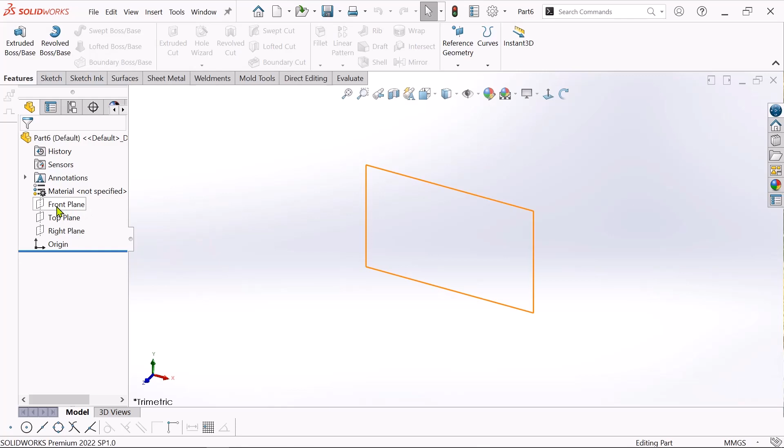Okay, just choose front plane and sketch, and go to this line and click center line and sketch a center line. This origin point, just click this origin point to this.

Now move it this left side and right side. If you confirm it is vertical, just when you get the yellow symbol as vertical, at that time you confirm your sketch is vertical. If you sketch at an angle, a little angle, you will not see the yellow symbol. Just move it on this origin, just see the yellow symbol is available visually, so we confirm that your sketch is vertical.

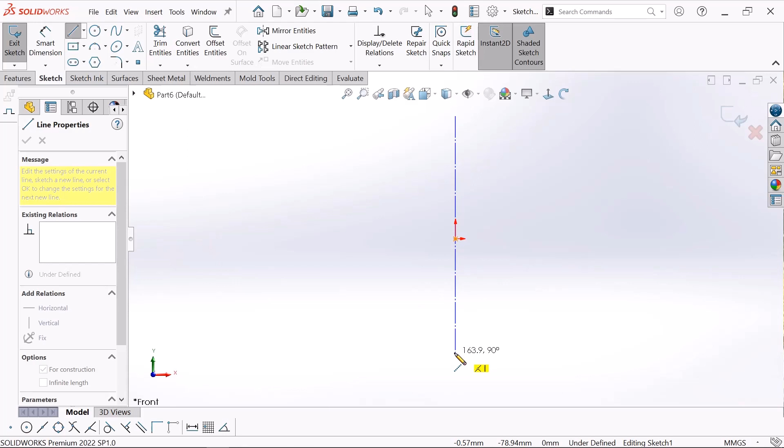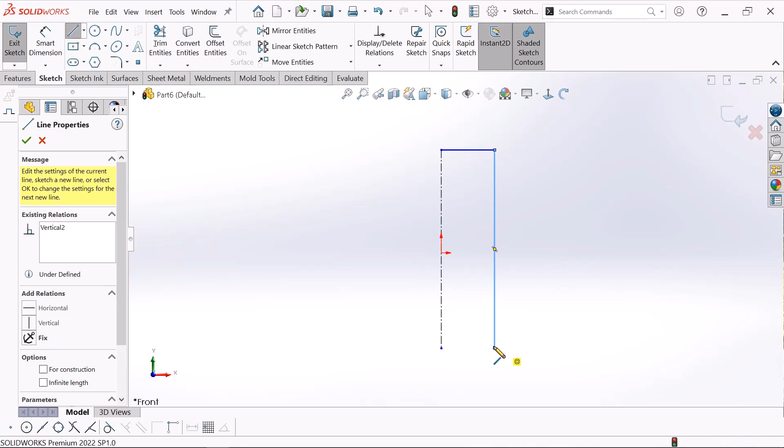Just click and right click and select. Now go to this line and sketch this point to the right side and this point downward, and again click this point to the left side. Just right click and select OK.

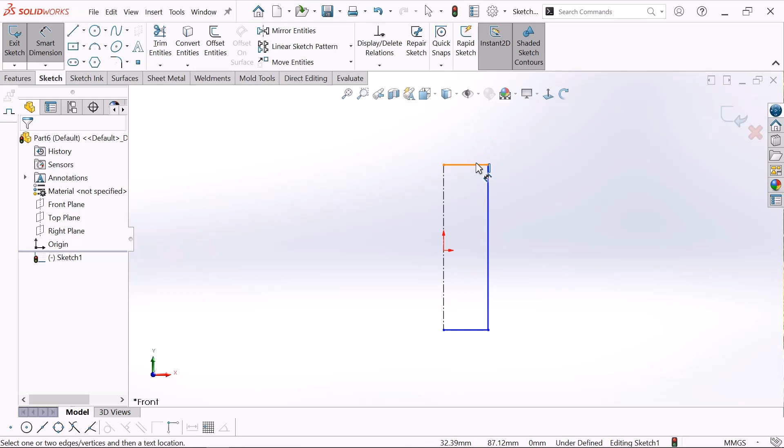Now go to smart dimension, just make it dimension, this dimension, suppose I will make it 150, click enter, and again make it, just click and click 40, click enter. Now our dimension is fully defined.

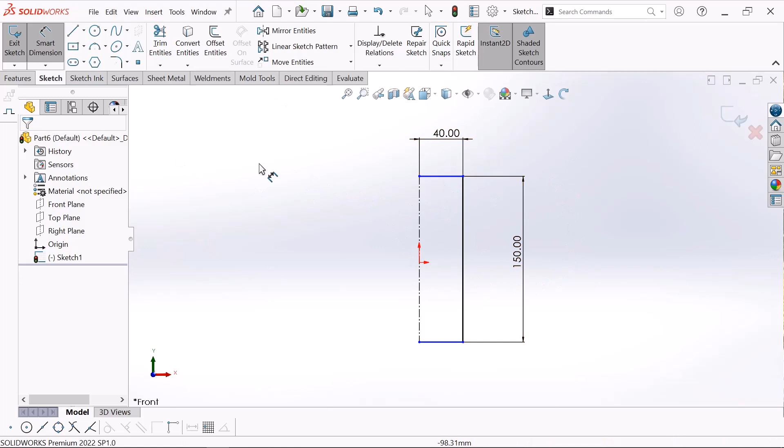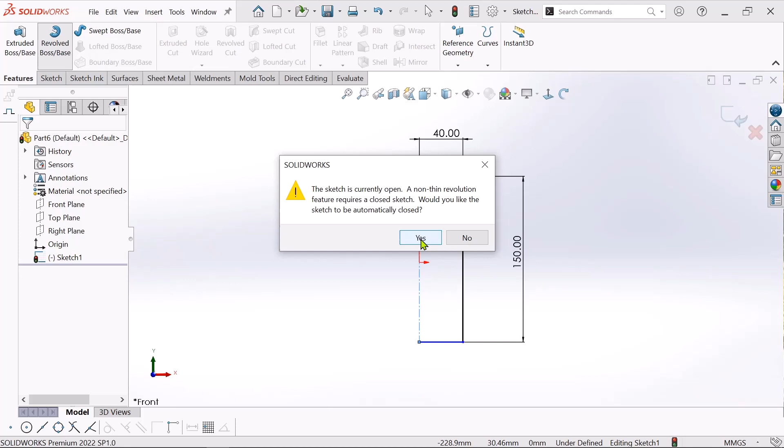Just we will revolve it. Go to feature and click revolve boss base. Just click, and it's asking if the sketch is currently open for a non-thin revolution. Would you like this sketch to automatically close? Just yes, okay, click. Now see, it is automatically selected as the axis line. Just now click OK.

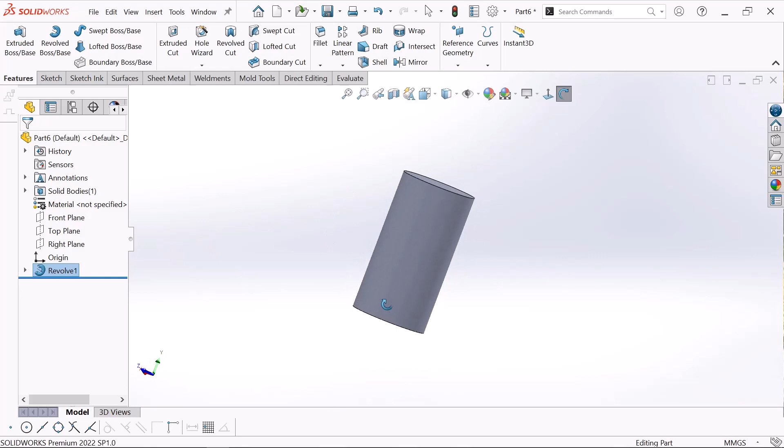Now see, our revolve boss is created. Now we'll learn revolve cut. So just click front plane and click sketch.

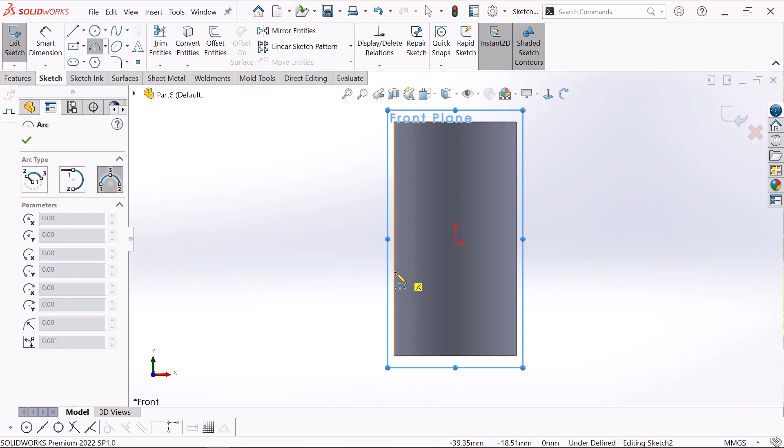Now we'll go to this side and click 3-point arc and sketch a 3-point arc. Suppose this point to this origin point, click and just move it and drag. Just move it upward and downward. Just click here and right click and select OK.

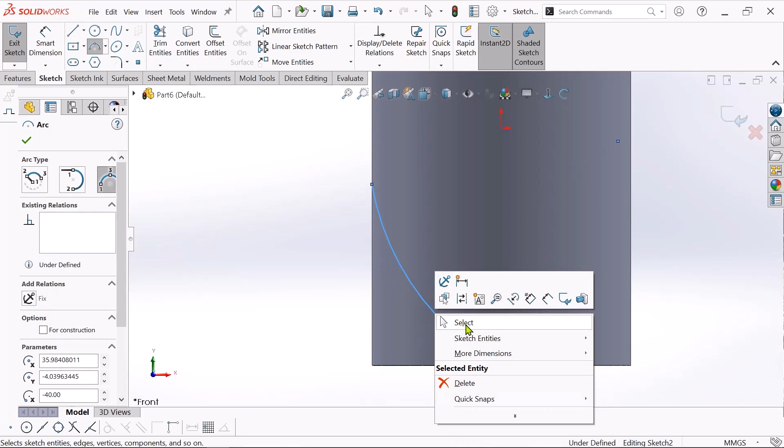Just drag it. It will not drag because it is fixed. So just click here, right click and delete this, and again drag it in this little half.

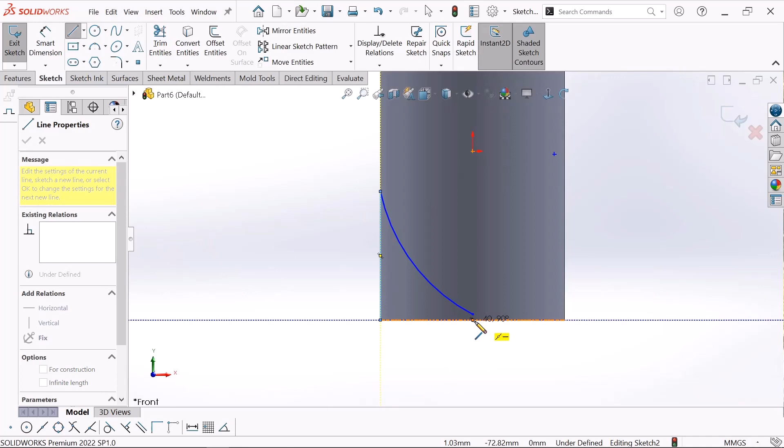Now OK. Now again sketch this line and sketch this point to this point, and again this point to this point, and again this point to this point. Now see this point to this point, click OK and right click, select OK. Now our sketch is created.

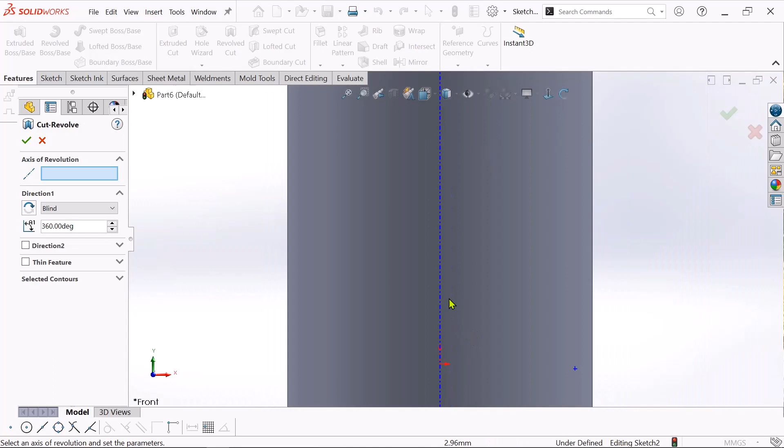So now go to feature and click revolve cut, and select this origin. This is our origin. Just I will click this origin. See, this is our origin. Now see, it is revolve cut. It is visual. So now we will click this OK.

Now see, it is revolve cut. Okay. This is the cutout revolve.